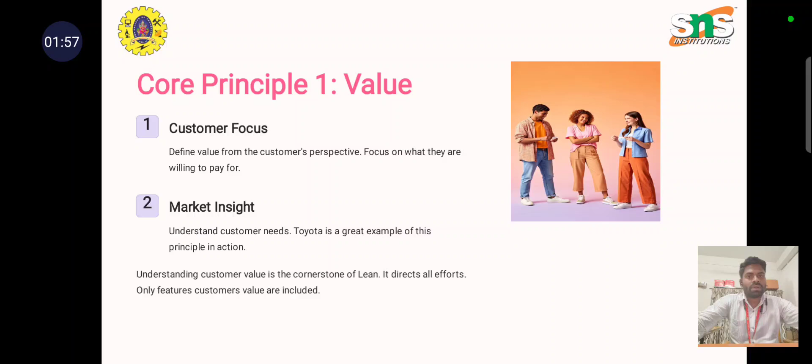The second principle is value stream mapping. Once feedback is received from the customer, we conduct a brainstorming session among employees of the organization closely associated with R&D and design, identifying the demand of the customer and the features that increase the value of the product. These requirements need to be segregated and mapped. This mapping process visualizes the entire process and delivers value to the customer.

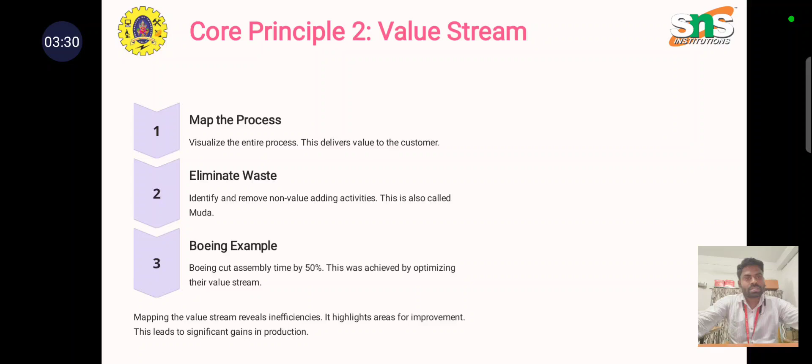The next principle is eliminating waste. Once we conduct the brainstorming session with the relevant persons, we use that feedback to identify and remove non-value activities in the process, which are called wastage. By eliminating this wastage, we can ensure the process or product is produced in a good manner, matching the aspirations the customer requires.

Another aspect is wastage itself, which leads to downtime in the industry, affecting the process, product, or overall organization. These wastes include defects, overproduction, waiting time, or not utilizing talent, whether employees or process time.

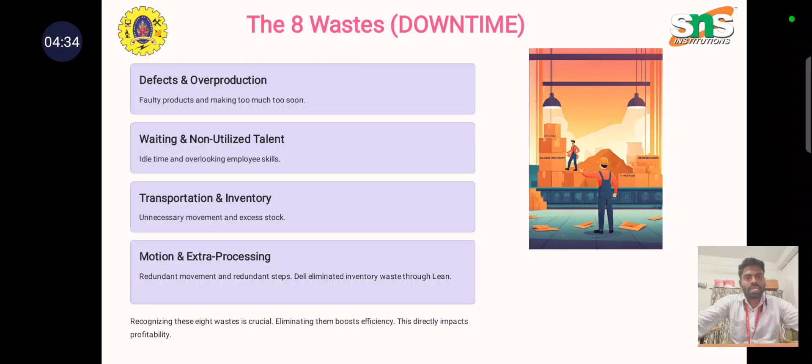Further wastes include transportation and inventory—inventory leads to huge accumulation of things within the organization. The next is motion, which wastes time through unnecessary transportation and movement within the organization. Then there's extra processing: once we make a product with defects, we need extra processing, which also leads to wastage.

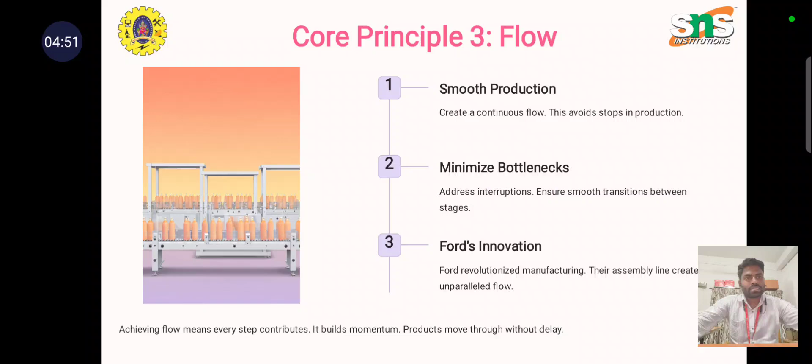Another principle is flow of process—we need to identify a smooth production flow while minimizing possible bottlenecks. The next principle is pull, the process we implement in lean manufacturing, which produces products based on customer demand and satisfaction. This follows customer demand through just-in-time processes and the Kanban system. These are the value-adding techniques in the process.

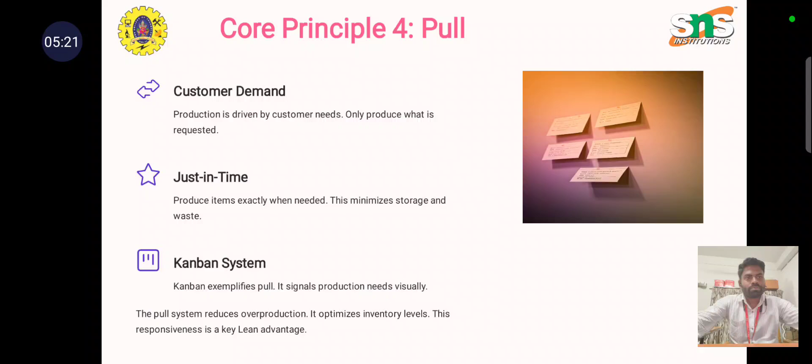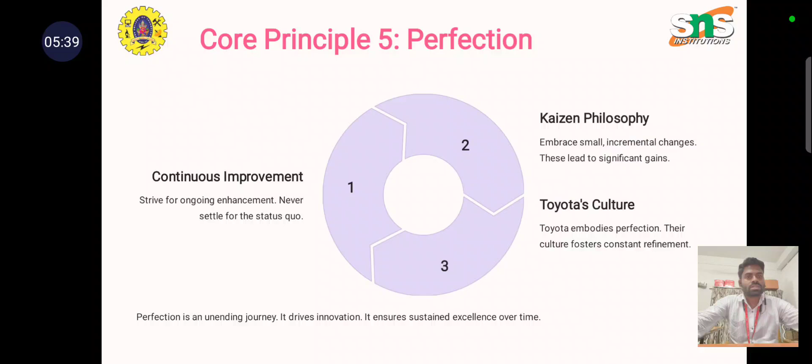The next principle is seeking perfection. Once we follow the above processes in the correct sequence of operations, along with continuous improvement through Kaizen techniques and just-in-time processes, we will achieve perfection in the system.

The key steps for lean manufacturing implementation include Gemba walks, 5S methodology, and value stream mapping. These are the sequence of process steps involved in lean manufacturing.

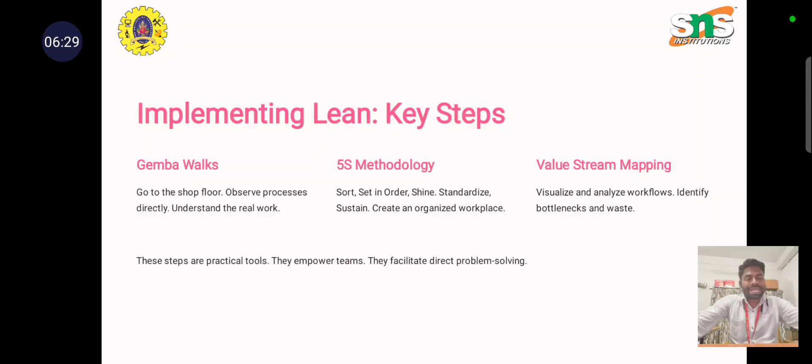By implementing these lean manufacturing techniques in production, industry, or the organization, we get maximum output from the work or production process, employees, and other associated parameters—maximum output from the system.

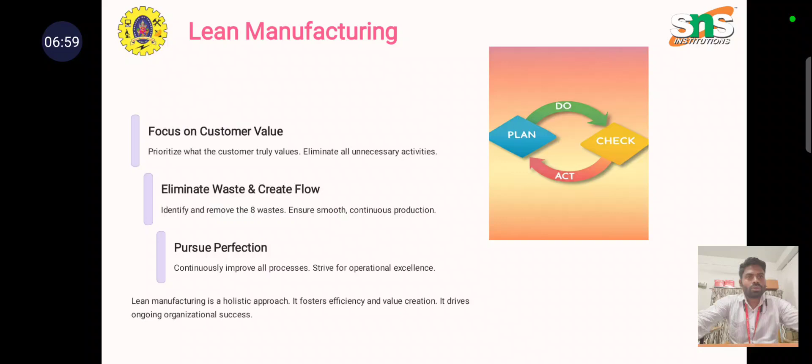Another aspect of lean manufacturing is to plan for perfection. Once the planning is over, we implement the plan, then check what changes are needed. Once identified, the process will add value, and then we act accordingly based on what we planned in the system.